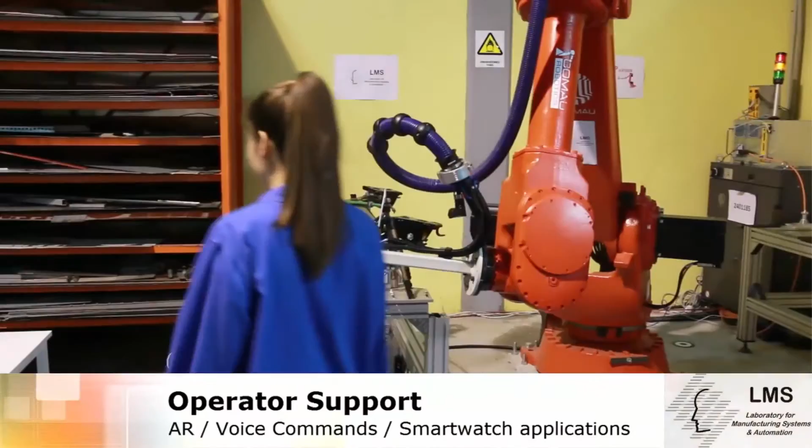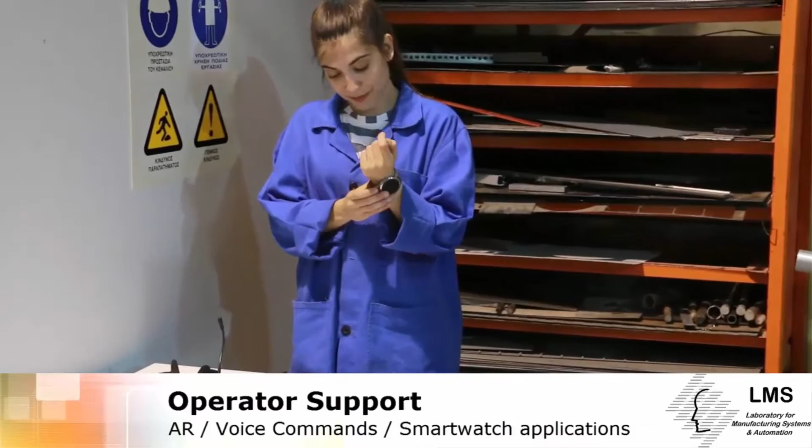The latest research trends envisage the collaboration between human operators and industrial robots. The European project ROBO-PARTNER aims to define strategies for removing fences, and allowing human operators and industrial robots not only to work more closely but also safely.

The focus is given to providing efficient means of supporting the human operators, under a safe collaboration scheme, by integrating for the first time technologies such as augmented reality, smart watches and voice commands.

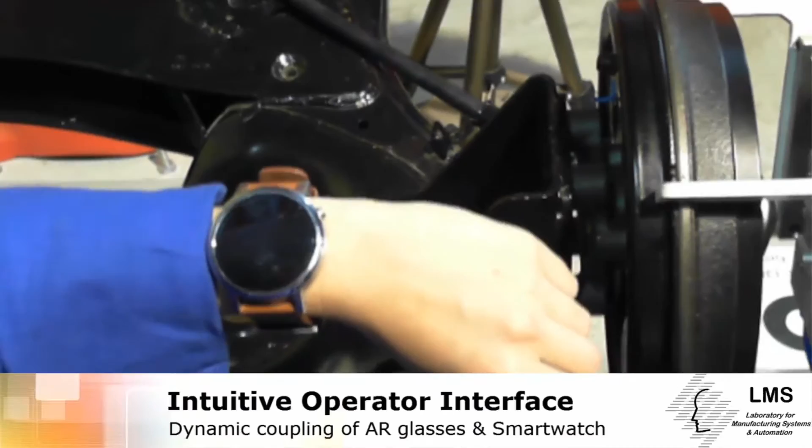Smart watches have become popular over the last years thanks to their ease of use. LMS has developed applications that allow the pairing of a smartwatch with the operator's glasses, by means of a simple QR code scan. A pilot case from the automotive industry, involving the assembly of the rear wheel group, provides an ideal scenario for the workout and validation of the ROBO-PARTNER concepts.

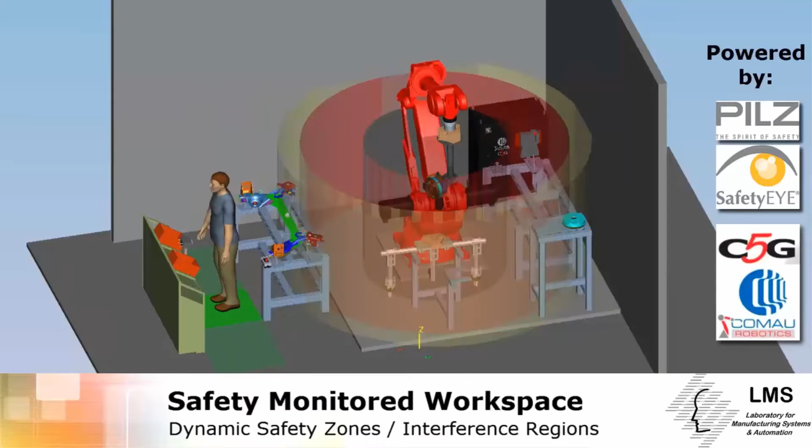To guarantee the operator's safety, LMS in cooperation with Pilz and Comau have designed safety concepts using state-of-the-art sensing and control technology. The Pilz SafetyEYE sensor has been integrated for the first time directly with the robot motion control, enabling the dynamic changing of safety zones.

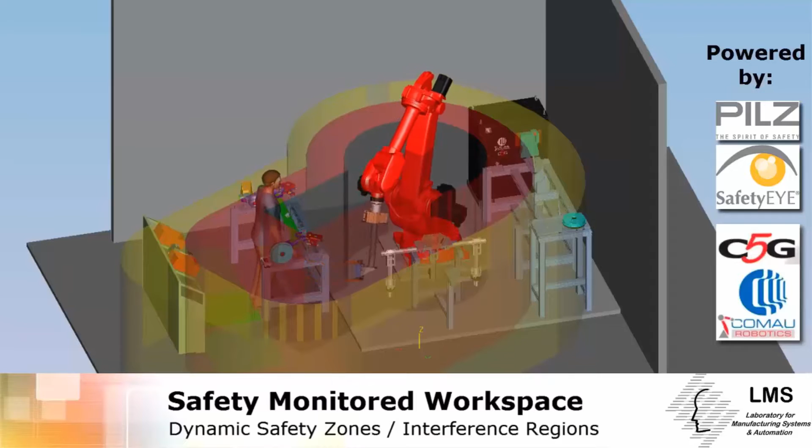Safely monitored interference regions, provided by the Comau C5G control technology, are also used in order to ensure in a certified way that the robot tool is always in the desired position. In this way, the human operator can easily and safely move and work closer to the robot.

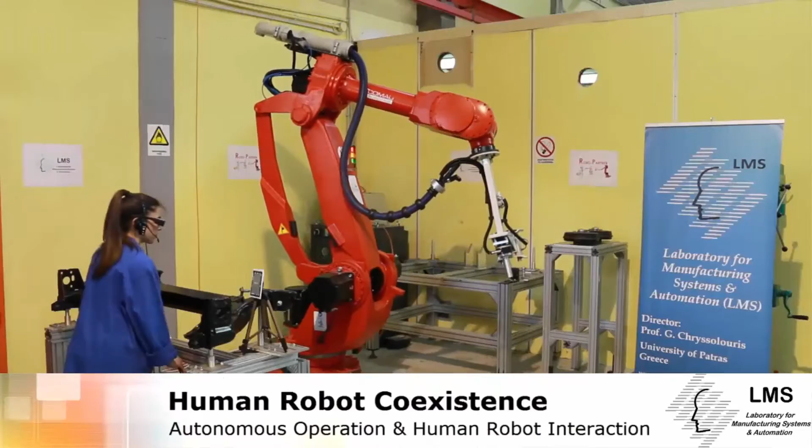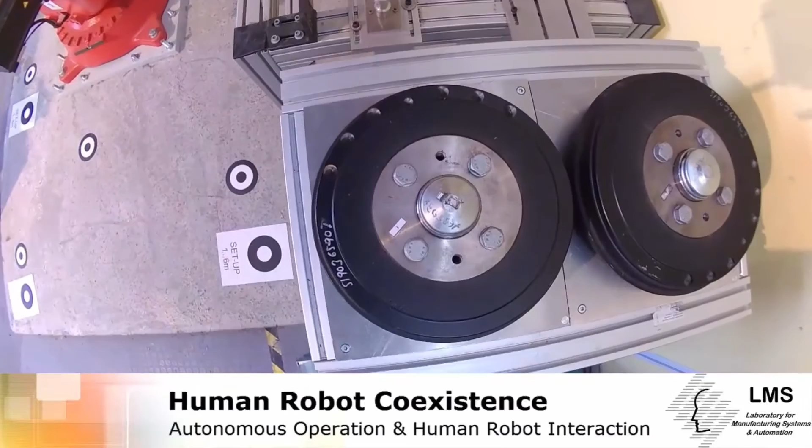In the ROBO-PARTNER, the role of robots is to undertake physically demanding tasks and act as assistants to humans. In this case, a 14-kilogram wheel group is carried by the robot from the kitting to the assembly area, relieving the operator of the strenuous task that has to be repeated more than 500 times within a shift.

Physical strength, gender and age barriers will no longer be a constraint, thanks to the human-robot synergy effect. The vision is to exploit the robot's power, accuracy and repeatability with the human's intelligence and dexterity.

In the final application, the same robot will be used in order to load the complete axle, and further reduce the non-value-adding tasks that are now performed by humans.

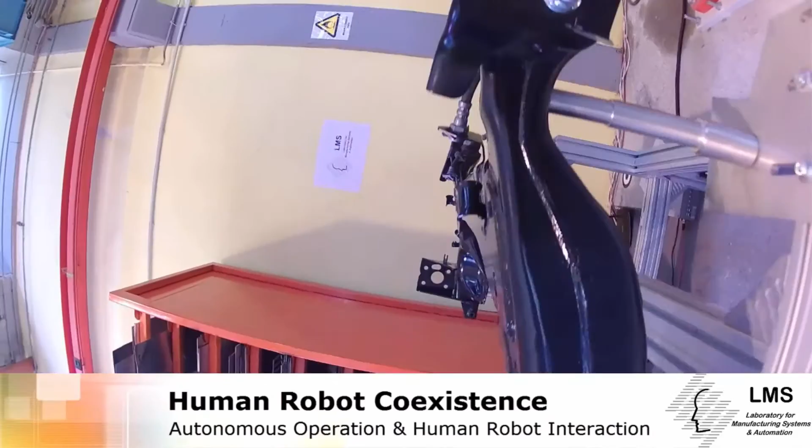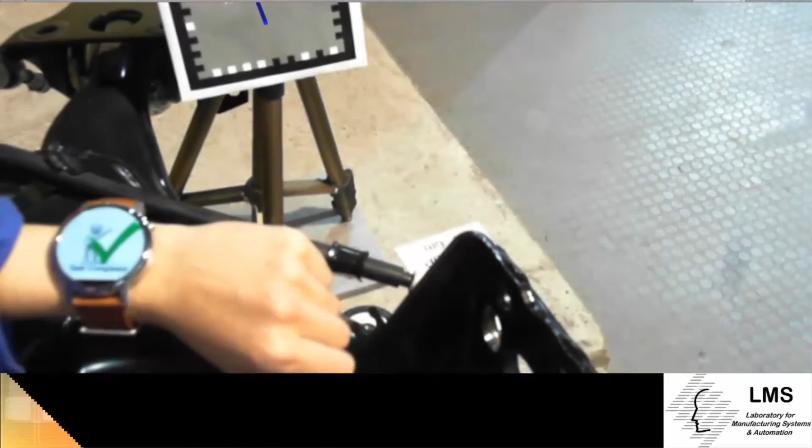Through the use of augmented reality technology, ROBO-PARTNER aims to reduce the cognitive load from the operators in the factories of the future. An innovative smartwatch interface allows the operator to receive assembly instructions and intuitive visualizations for every task that needs to be performed.

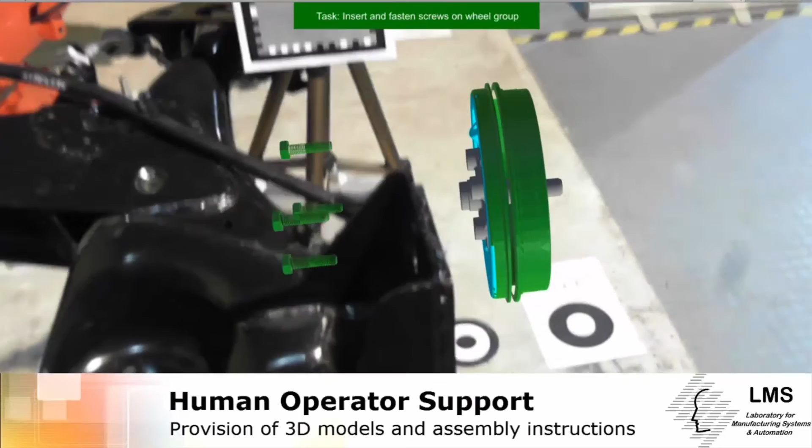The request for support is transferred through the smartwatch to the augmented reality glasses, that can overlay 3D models and text-based information on the operator's field of view.

The communication loop between the human and the robot is closed through the capability provided in order to confirm the task's completion, with the pressing of a button on the smartwatch.

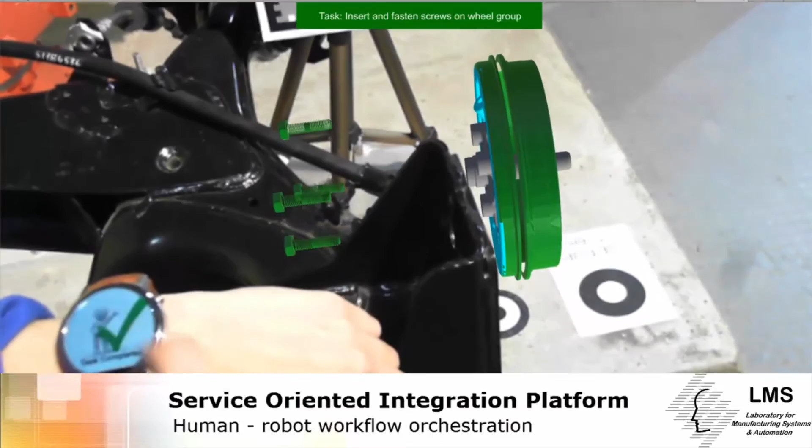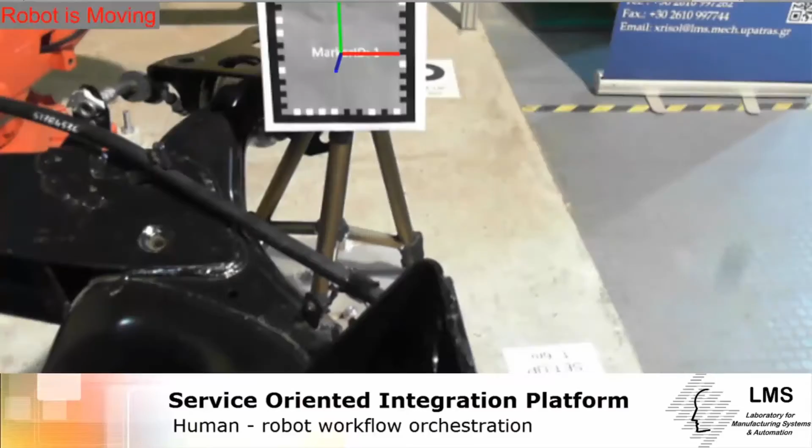To coordinate the common workflow, LMS in cooperation with Intrasoft have implemented a service-oriented integration platform based on ROS. The platform acts as the central execution controller, monitoring and visualizing in a web interface the production status, based on the feedback received by the robot and the human.

To further increase the awareness of the operator on the execution status, visual alerts are provided through the augmented reality interface for events, such as the robot motion start and stop. The integration platform ensures at all times that all tasks should be executed in the correct order.

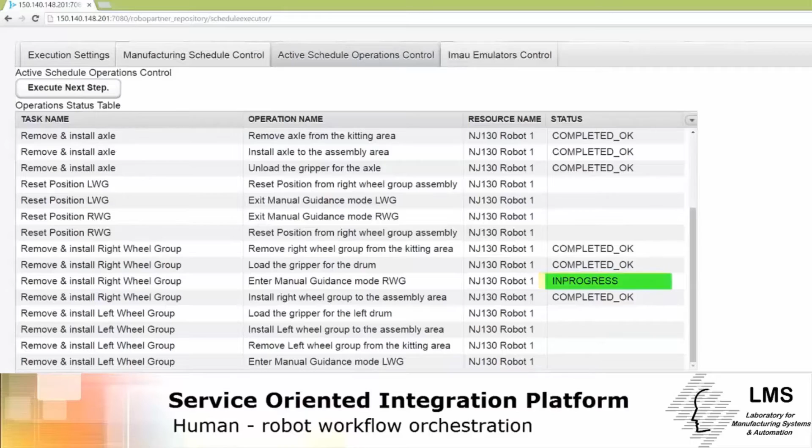A closer collaboration between the human and the robot is achieved when they operate not only in the same area, but also on the same product.

In this scenario, the robot is holding the heavy part, and at the same time it allows the operator to manually guide it to the proper assembly position. The robot supplies the required power, and the human contributes the perception and intelligence functions required for alignment and assembly of the parts.

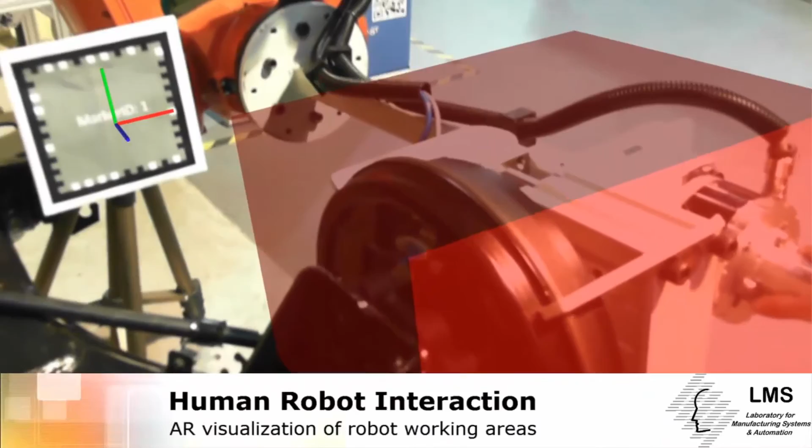Throughout the collaborative operation, several underlying safety concepts are applied. To avoid collision of the robot with the environment, virtual volumes are used in order to constrain its tool in the 3D space. The operator is able to visualize these regions through the augmented reality glasses, and thus be aware

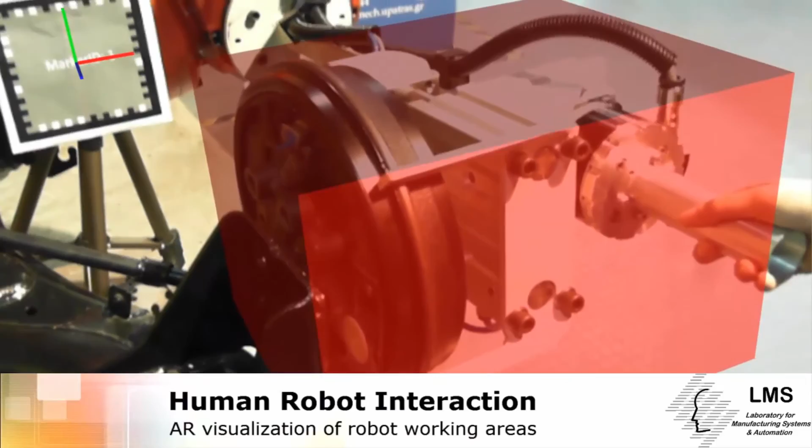of the high-risk areas that he or she should avoid when guiding the robot. As a last resort, the robot will not allow movement outside the defined areas, so as to guarantee safety of all production entities.

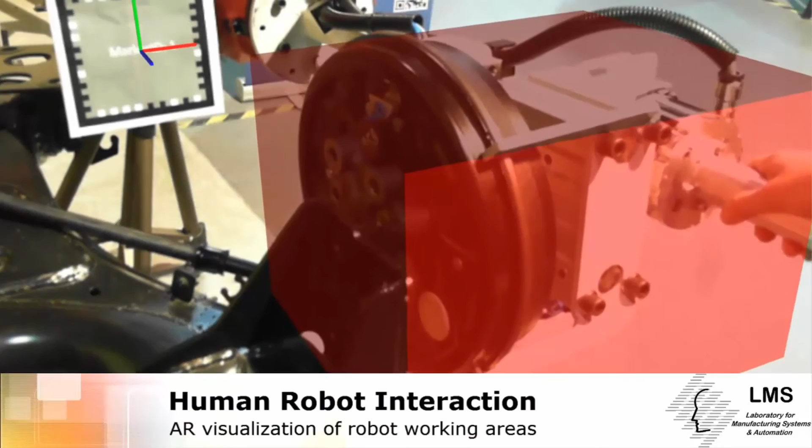Further approaches to simplify the interaction between the human and the robot involve the use of simple voice commands. Through the developed smartwatch interface, the operator can verbally request the robot to stop or resume its operation. Moreover, primitive movements can also be performed in order for the robot to be guided to the desired position.

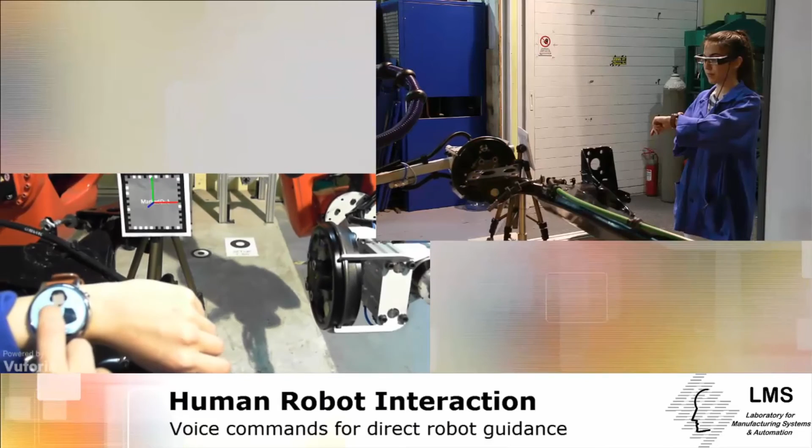The smartwatch acts as an enabling device, allowing the robot to move only when the operator's finger is in contact with the screen.